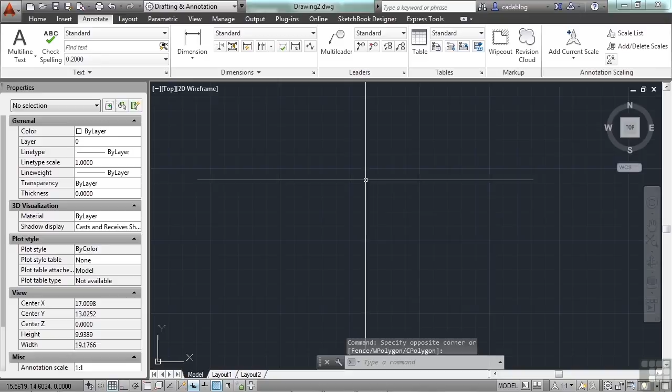If you start the M-text command, pick a box anywhere, it doesn't really matter. Then right-click inside the box. Now you want the Import Text option. Browse to the folder where we're working.

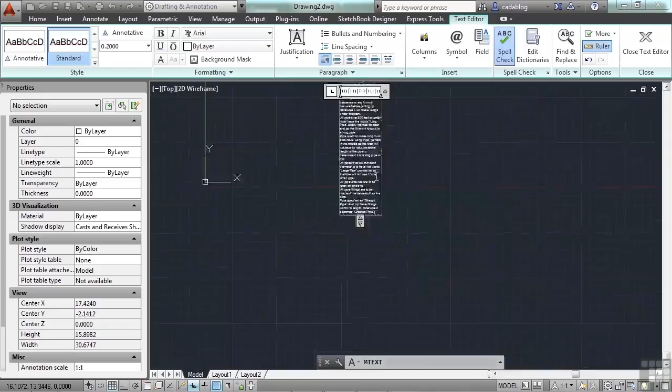And insert the note-pipe.txt file. With this import option, you can import a TXT file, something that someone has already typed up and saved as a TXT file. It's raw data, it's just the text, it's not formatted. AutoCAD can insert that and put it right into your text object.

Once done, just click right outside there. This is a note. It's a bit of a humorous piping note that you may want to take a look at. Some of it's quite funny. But let's copy this text object. That way we'll have the original still intact and we can mess with this one and I can show you some things you can do with it.

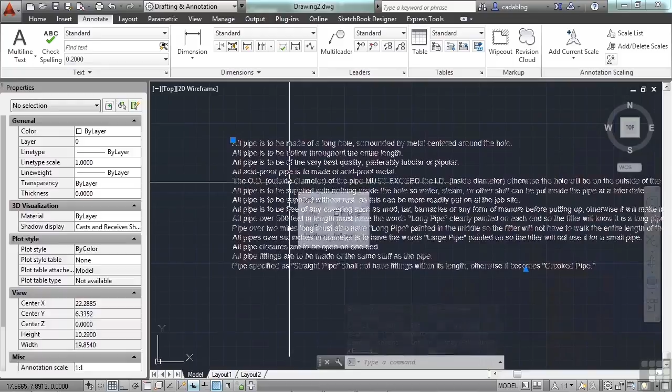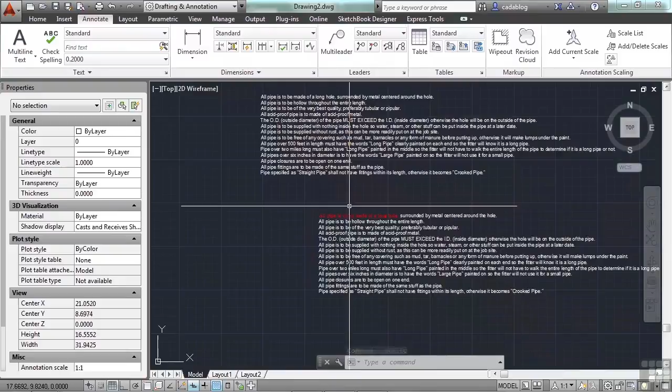So for example here, if I change the font type inside the editor for this part of the note, or if I change the color, I can do that. But now I have problems with the text style. If I use the match properties, I can change the style.

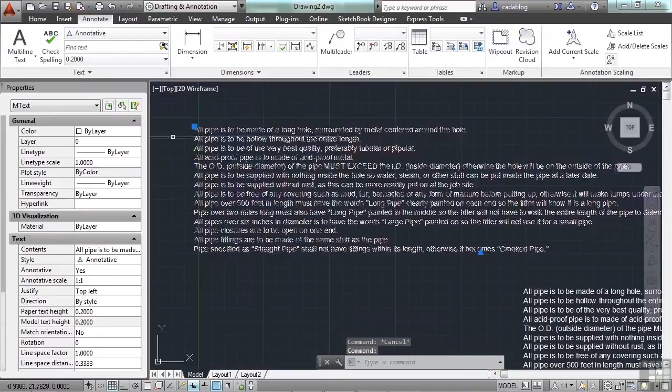But watch as I take an unaltered text object, and if I change its style, now we see here this style is set to annotative. This style is set to standard. This one is still set to standard. So if I start the match properties command, say I want everything to look like this one, I pick these two.

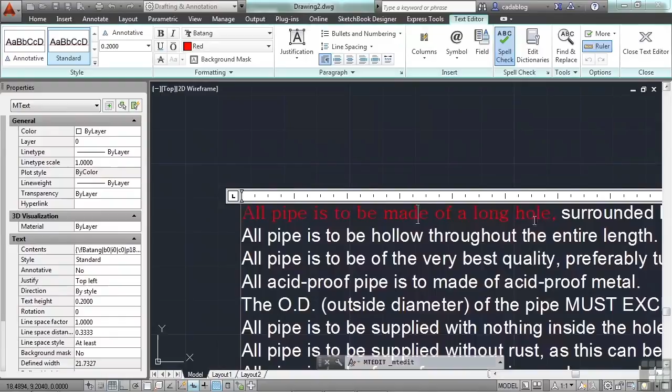Well, this is now set to standard. This one is set to standard. And this one is set to standard. But that part that's red in a different font, I can't put it back to normal. If I double click the text and I want to override these settings, I can't.

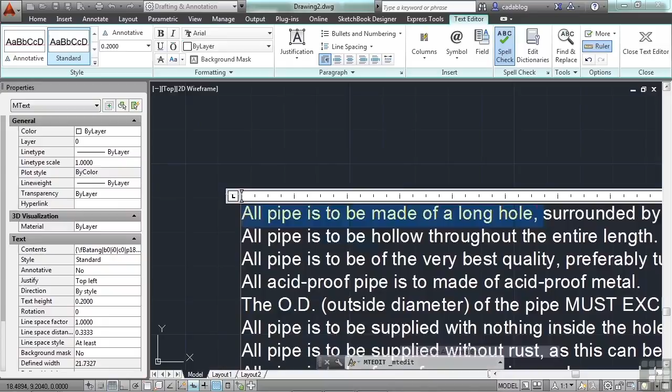I have to come down here to this remove formatting, say remove all, and then I can come and make my changes. So you have to be careful with it. It makes things difficult, but you can do it. You'll have to go a few extra steps to fix it. So just be careful with that.

M-text can also have a background mask applied to it. We looked over that briefly, and we found out a way on how to mask it. I want to demonstrate that to you again. The quickest and easiest way to do that is to just keep your Properties palette open. Select the text and go to Background Mask.

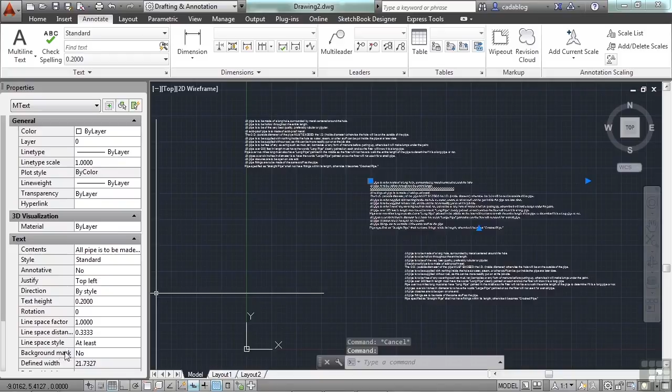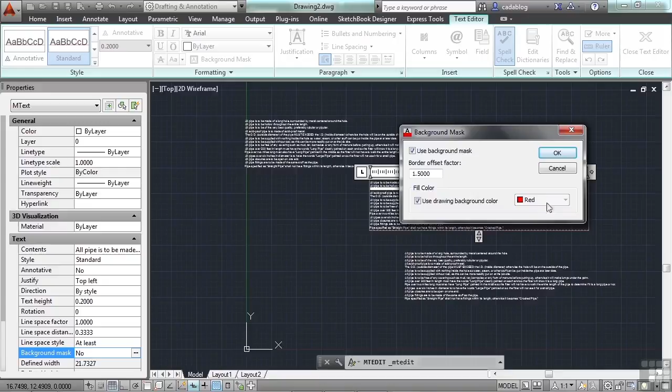Now, you can also activate the editor in here and go to the Background Mask and get your settings this way. We'll use the background color for an example here. If you use the drawing background color, you don't get to change the color. So I can click on it and it won't do anything. It'll just stay where it was before, but it won't be red. Okay, as you can kind of see here, the background is grayed out.

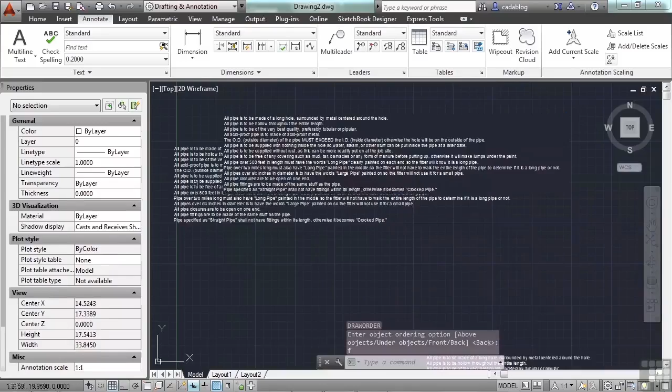You can't see anything. If I move this text over the top of this text, and if I make sure it is on top with my draw order, this text is blocked out. So you can kind of see that line right there. The text is there, it hasn't been changed, hasn't been deleted. And if I pick it, it pops up. But when I go to print, this is what it will look like. So that's a great method to use to keep your text visible, especially in a very busy drawing.

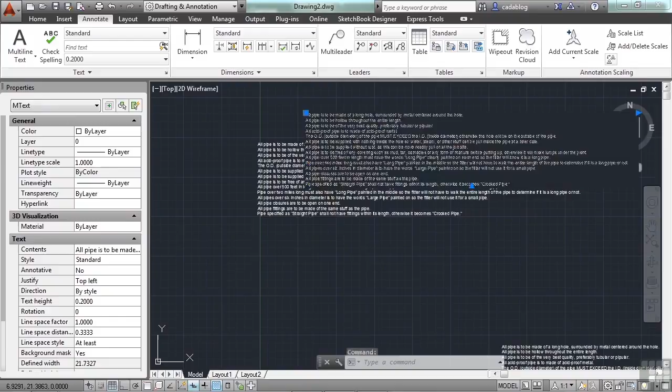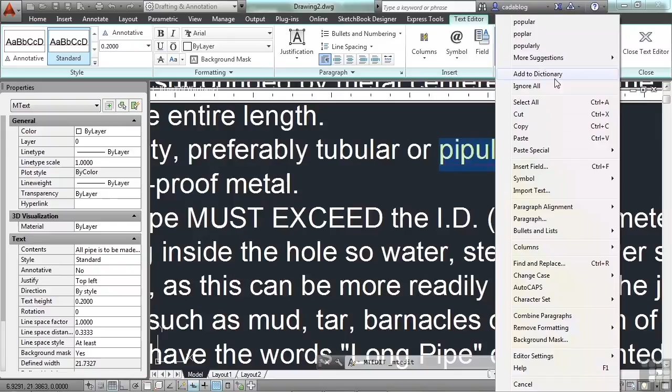So if you double click in here, you can see a spelling error is made. If you right click, you have different options or suggestions available. Maybe you meant popular. If not, just undo. You can find some more suggestions here. Or if it is a word and it is spelled correctly, you can click Add to Dictionary right here, or you can just ignore it altogether. This is a great way to make sure that you're spelling things correctly.

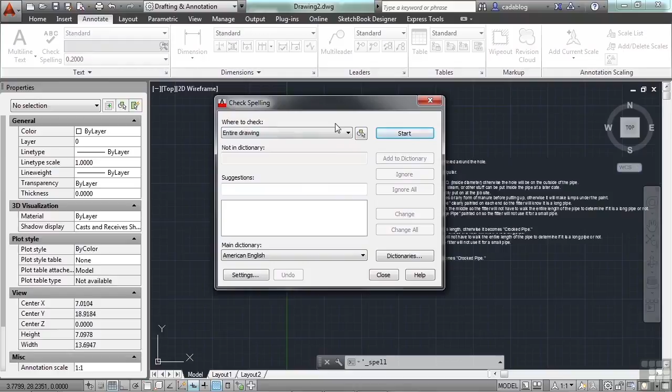You can also use the spell command. It's found right here in the ribbon, or you can just type in the word spell. This will work a couple of different ways. You can look in the entire drawing, the current space, or you can select objects. If you just want to select objects, you can pick this box right here. You can pick one or two or as many different text objects as you would like, and it works for dimensions, multileaders, single line text, and multi-line text.

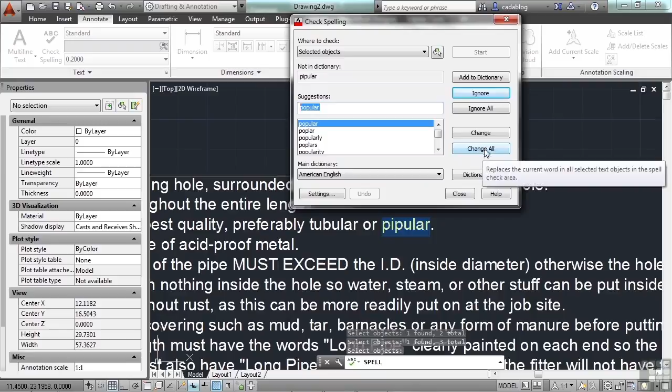Once you've selected everything, click Start. It'll do a scan, it'll find the word, it'll zoom right to it and give you some suggestions. And if the suggestions are wrong, you can just type it in right here, whatever it needs to be. And at every instance that this misspelling is found in your selection set, it will change all of them at once or just one at a time, or you can ignore them all. So those are some advanced editing techniques and tools that you can use when working with multi-line text.